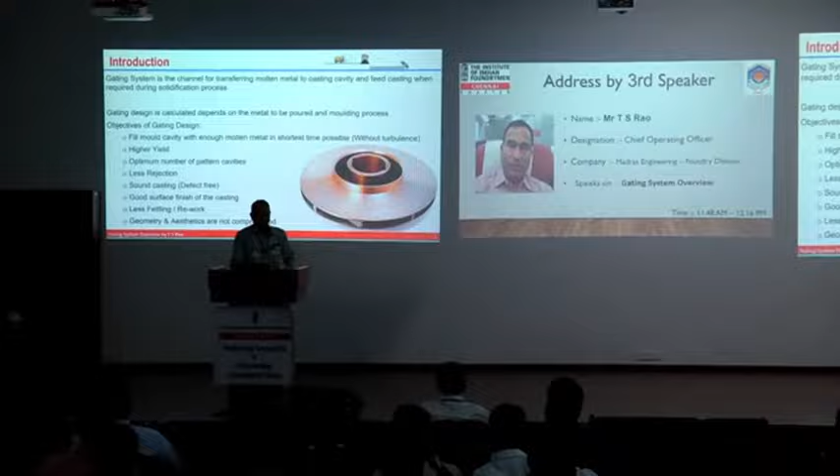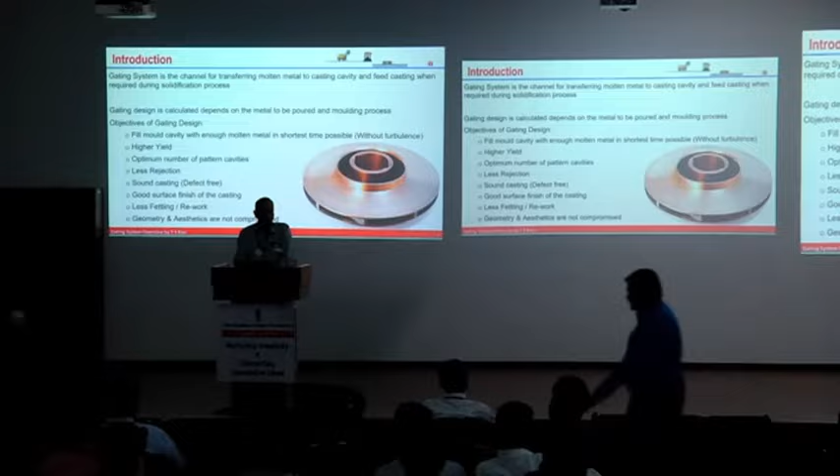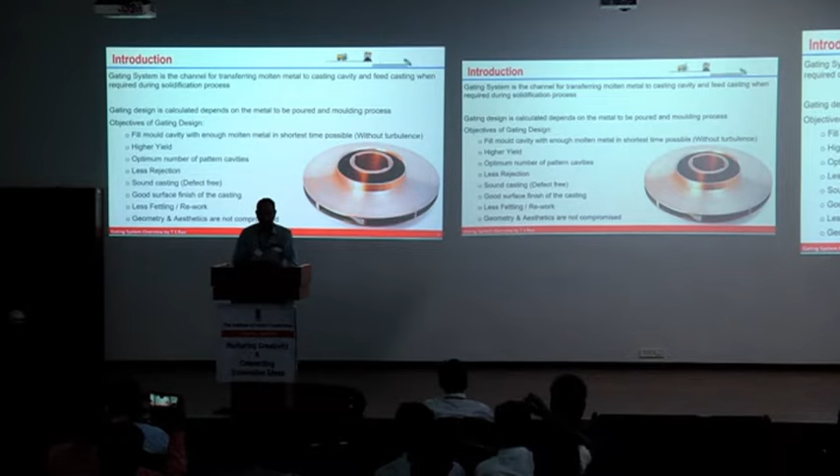Introduction. The gating system is a channel which is created to pass the molten metal into the casting cavity. The gating system depends on the material, the boundary conditions, and the processes we choose. The objectives remain constant irrespective of the material and the molding practice. We have to fill the mold cavity within the shortest possible lead time. Then you need a higher yield, like an optimum number of pattern cavities on the given pattern plate. And less rejections, sound casting, good surface roughness, less fettling or rework, and geometry and aesthetics are not compromised because of the gating.

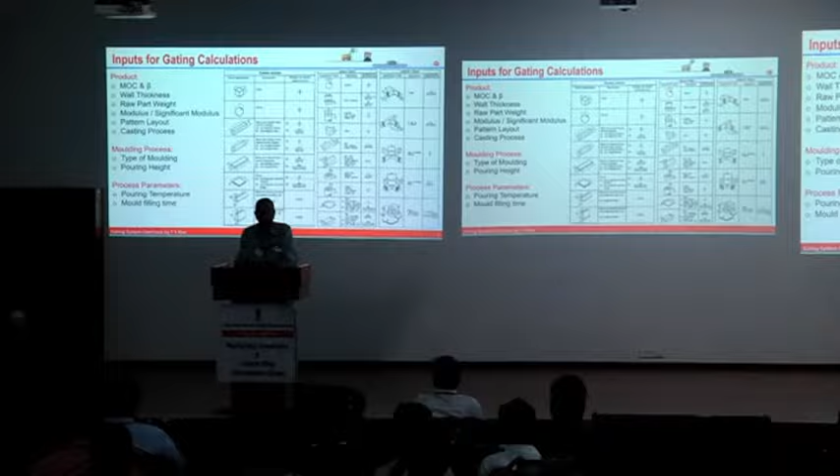These are the basic inputs for calculating the gating design: the material of construction and the beta. The beta is material specific. In gray iron, the beta is not significant. In ductile iron, beta is significant. In steel grades, the beta is more significant. The wall thickness of the casting you are going to develop, the raw part weight, the modulus, and the significant modulus. The modulus is the volume by the surface area. The hot zone with the last freezing area is called the significant modulus zone.

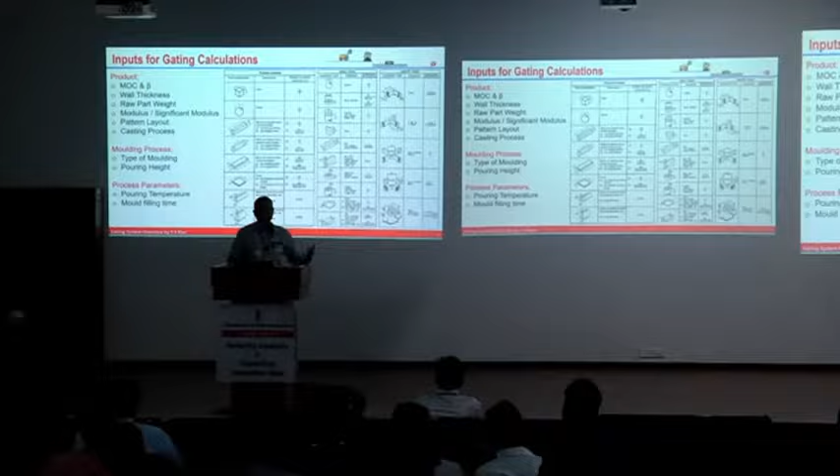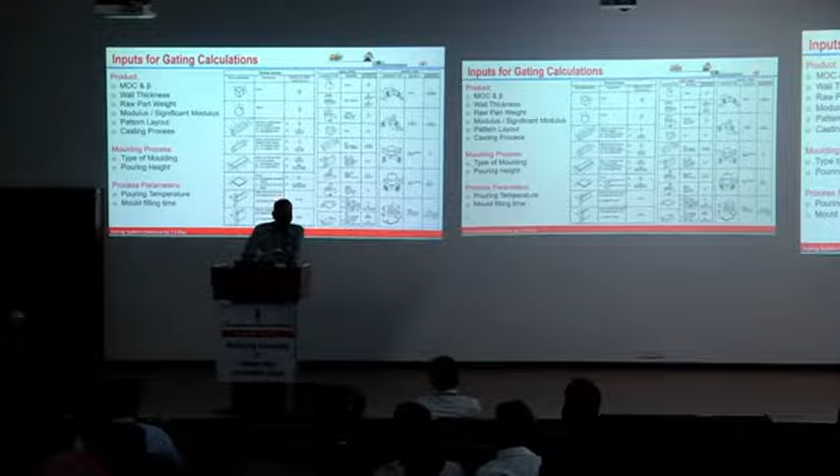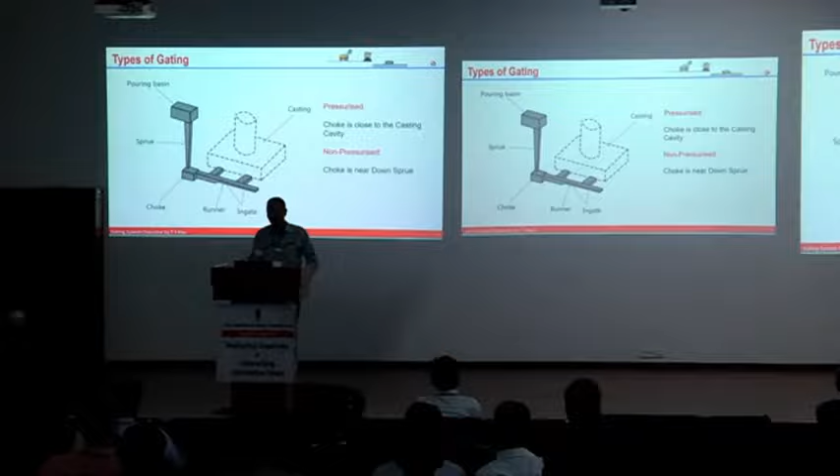On the next slide, the type of gating, there are two significant gating types. One is pressurized, another is non-pressurized. The difference between pressurized and non-pressurized is the choke. Where do you keep the choke? If the choke is near the casting, it is called a pressurized gating system. If the choke is near the downsprue, the gating system is called non-pressurized gating. Again, it depends on the wall thickness and the molding practices.

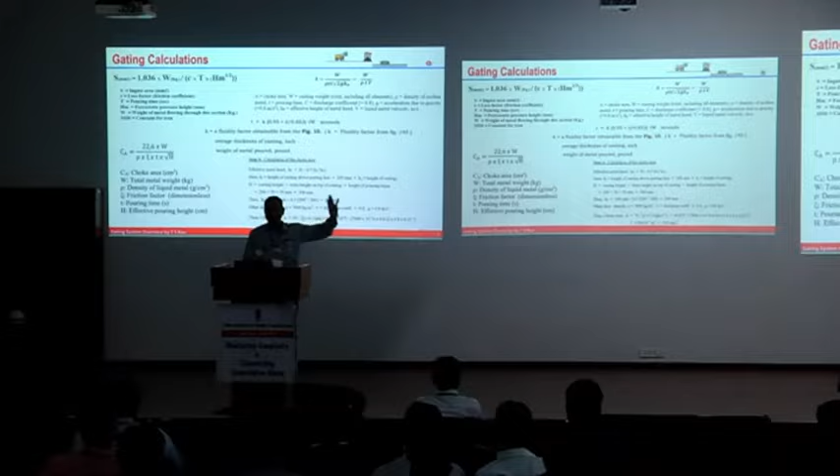We need to select what type of gating system we need to incorporate. Moving on, the gating calculation. There are numerous tables available, numerous calculations available for calculating the gating. But we need to customize, we need to select what is suitable to our requirement, and we need to try out whatever is the best and follow it.

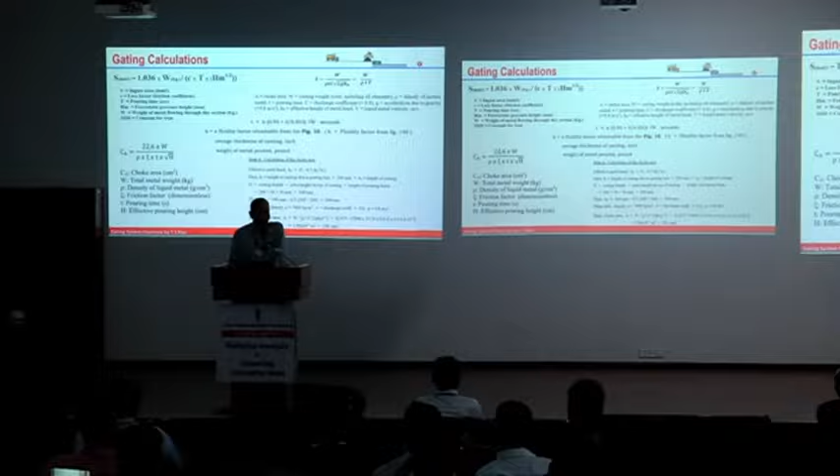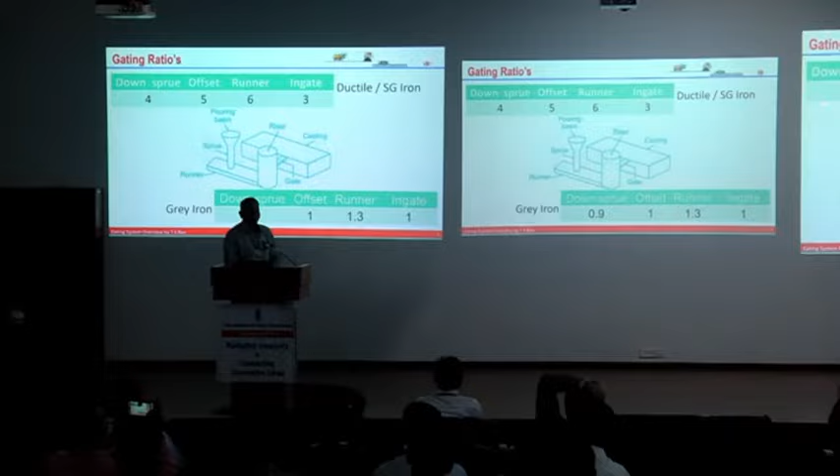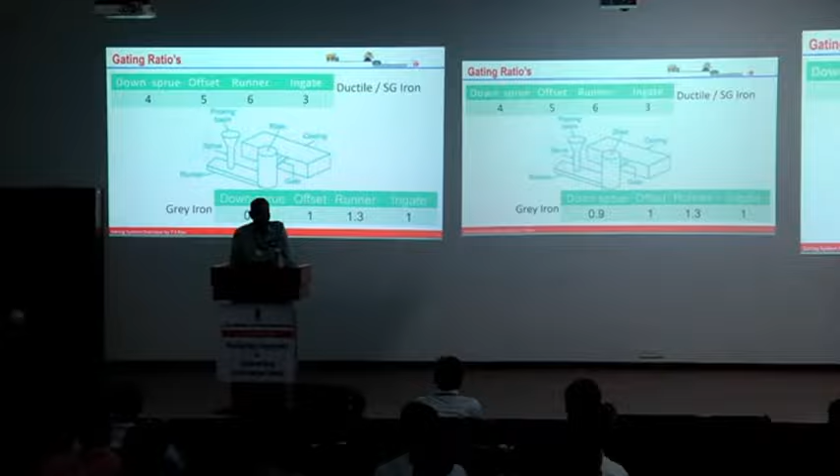These are the parts design. These are very important. The first one is the down sprue. This is the typical shape of the down sprue for withdrawal of the mold. And the bottom is called the sprue cup or sprue well. Next one is the runner bar. The dimensions of the runner bar are 1:2, where 1 is the width and 2 is the height, and some foundries make it tapered to have higher yield. Some foundries will have a slag trap at the end of the runner for collecting the slag.

The next one is the riser and the riser neck. For the riser, the dimensions are 1:1.5. When the diameter is 1, the height can be 1.5 or maximum 2. It cannot go beyond 2. And the bottom is the riser base. Then is the in-gate. The in-gate is 1:4. The length is 4 and the height is 1. And this is the neck which is connected to the casting. The chamfer is given so that the gating will not break inside the casting.

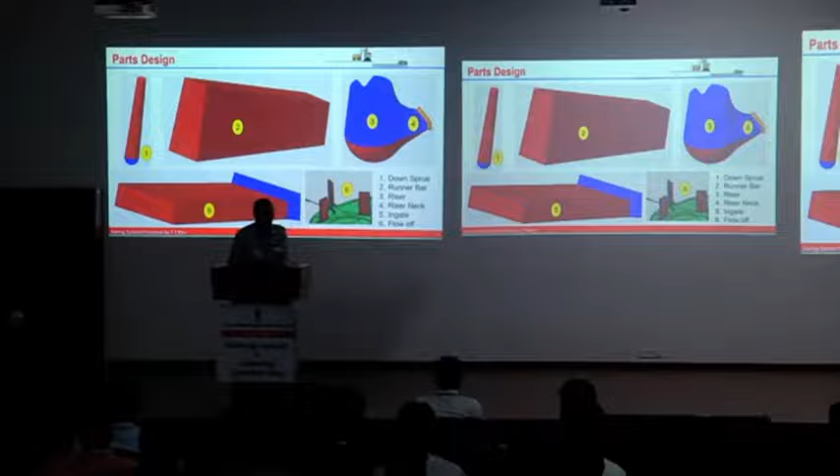These are the flow-offs. There are different shapes of flow-offs you can have. It can be round, square, or rectangle, and it has to be tapered down for the mold release. These are the feeders. The feeders are important for feeding the significant modulus in ductile iron or stainless steel.

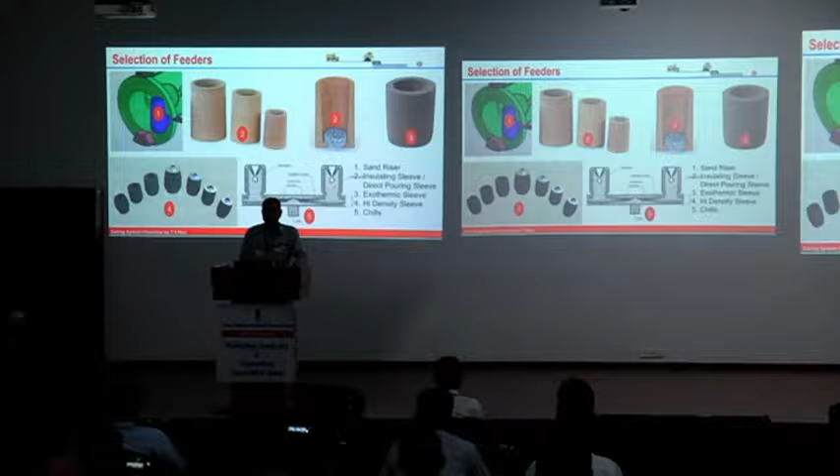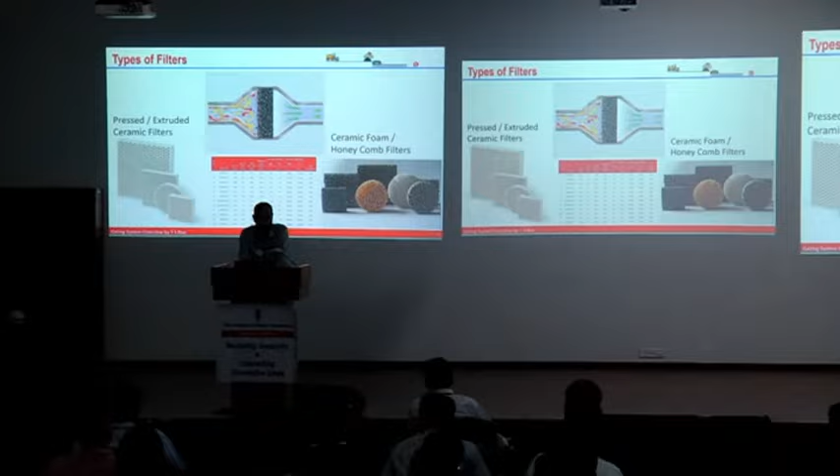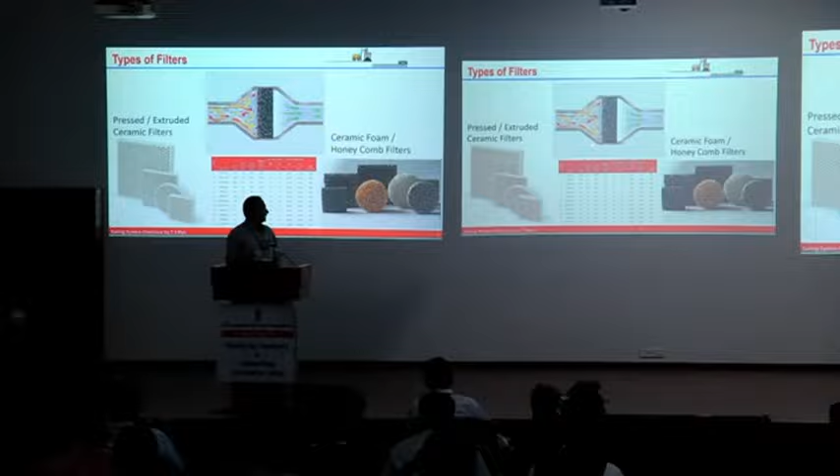These are the types of filter. There are two types of filters available in the market. One is the pressed or extruded ceramic filters, and it depends on the PPI, the pores per inch. Next is the ceramic foam filter or honeycomb filters. A lot of tables are available for selection of the filters. This is the purpose of the filter. It is like a tea filter. When the metal with contamination or foreign particles passes through the filter, only clean metal goes inside the casting cavity.

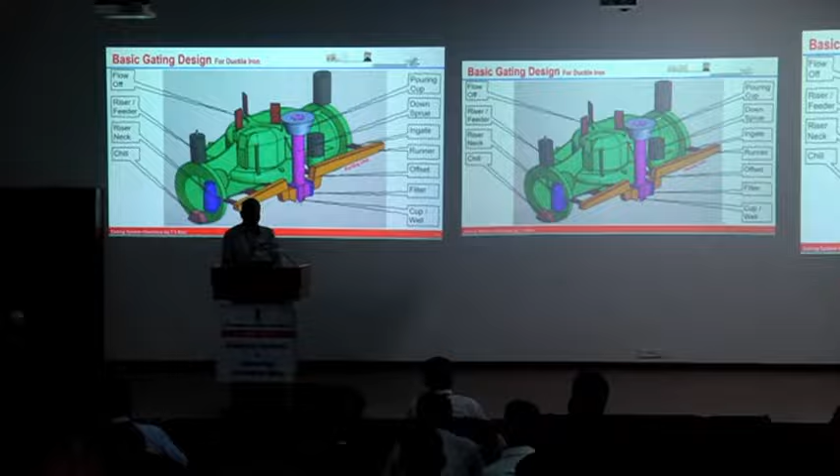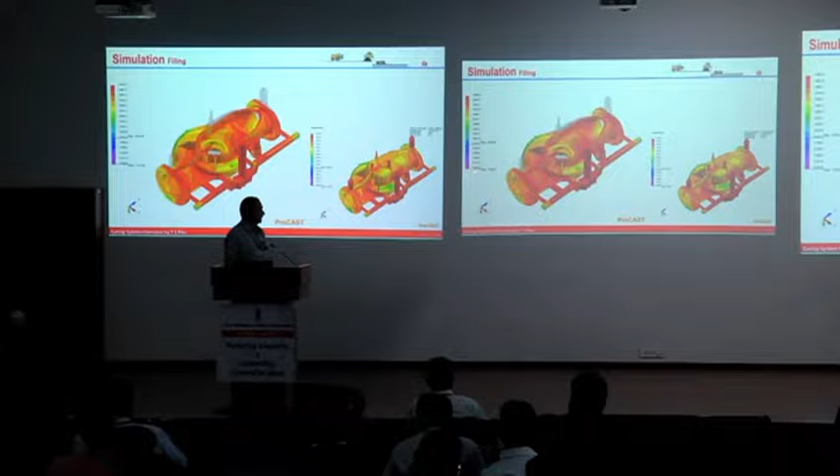So these are the simulations, thanks to the simulation software we have available now. The first one is the filling. You can see the temperature here, from 1123 to 1400. From the color code, you can make out what temperature it is. The hottest temperature is in the down sprue and in the risers, because these are exothermic; they retain the temperature for a long time.

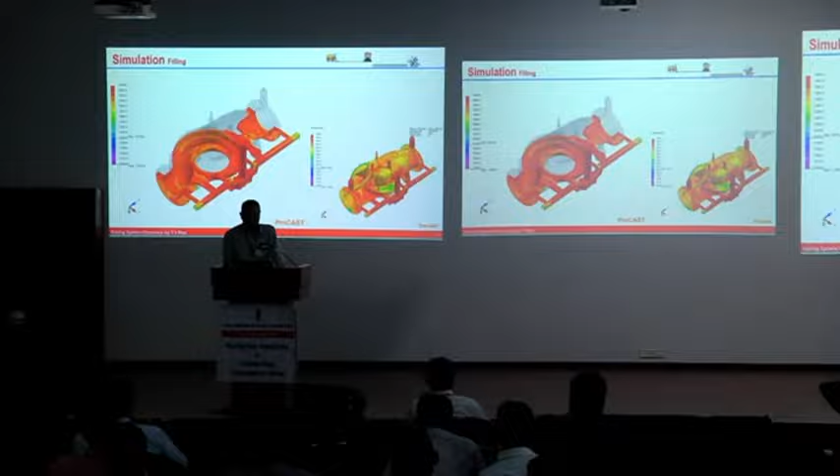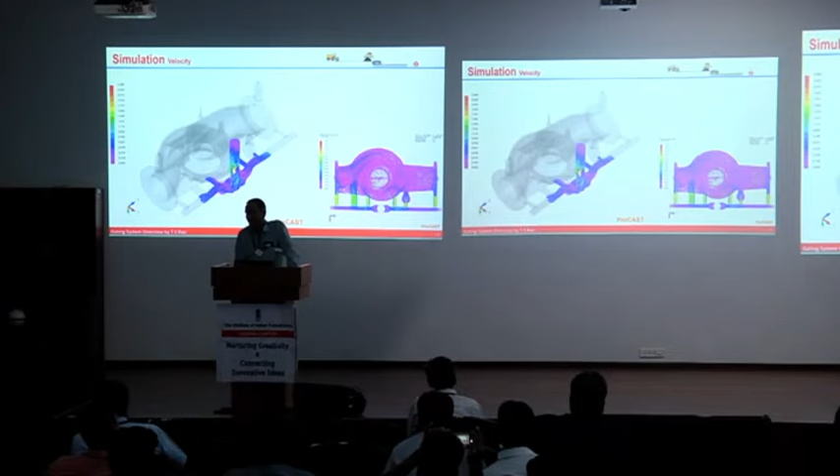The next one is on the velocity. Velocity is very important with respect to the casting quality. The higher the velocity, the higher the turbulence in the mold cavity, and the higher the inclusions in the casting cavity. Again, the velocity can be defined by the graphical form here, this color being 0 and this color being 2.

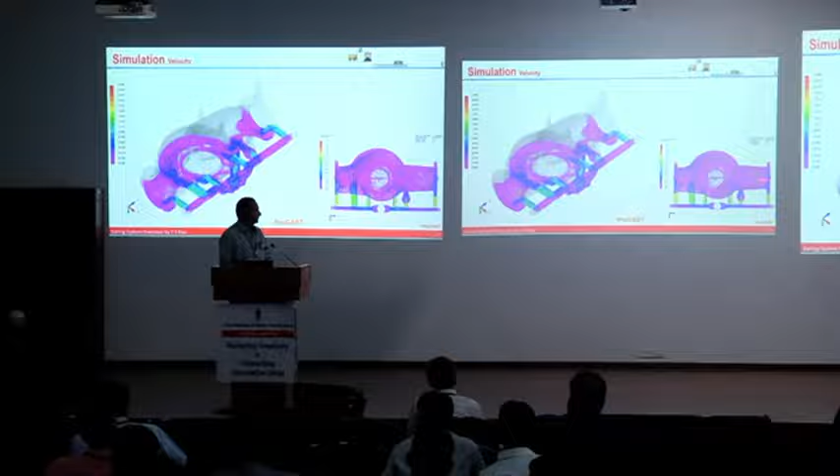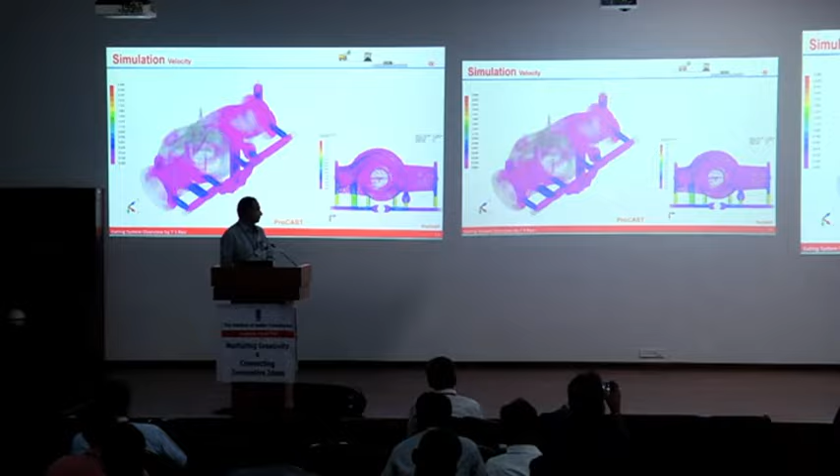Any velocity beyond 1.5 is dangerous. Normally you see the higher velocities in the ingates, because these are the chokes. We can also identify where the choke is in the whole gating system. The velocity is important with respect to having a sound casting and filling time.

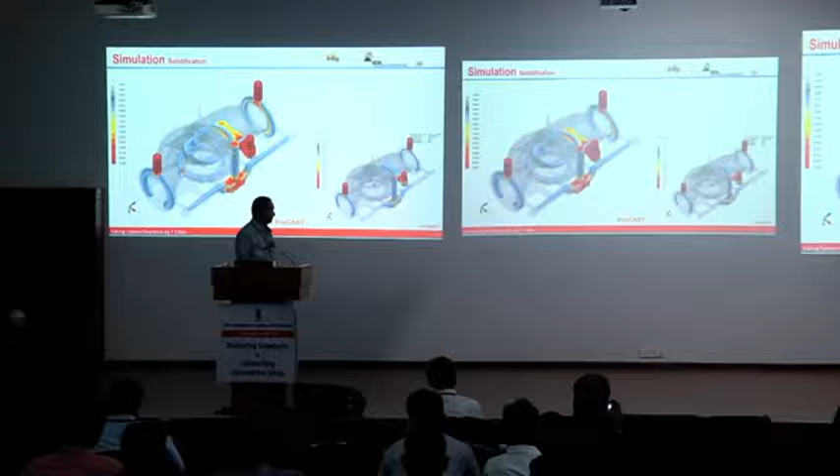Next one is the solidification, also called directional solidification. Here you can find out how the casting gets solidified. We know the thin wall starts solidifying first, and where the chill is connected, because chill is conductive, it solidifies first, then the directional solidification, and we can also see the isolated spots in the

casting cavity. Wherever it is solidifying last, if it is not connected to the feeder, you can see the zone. If it is not connected, we end up with a shrinkage here. Similarly here, if the isolated spots in the casting are not connected to the riser, we end up with a shrinkage.

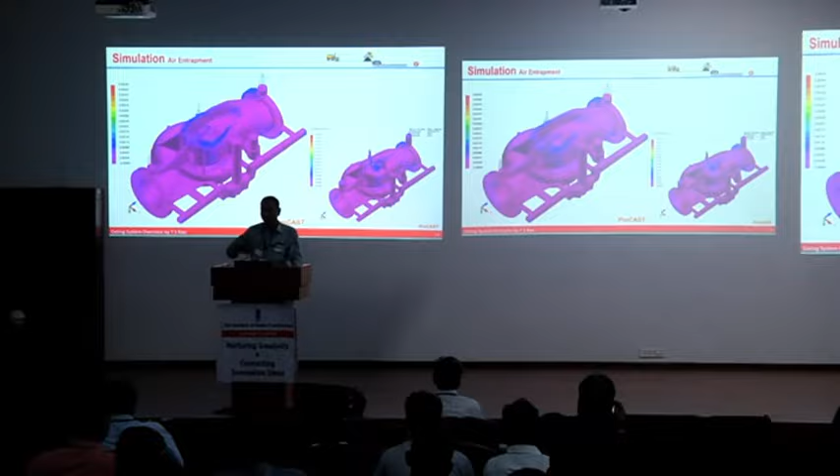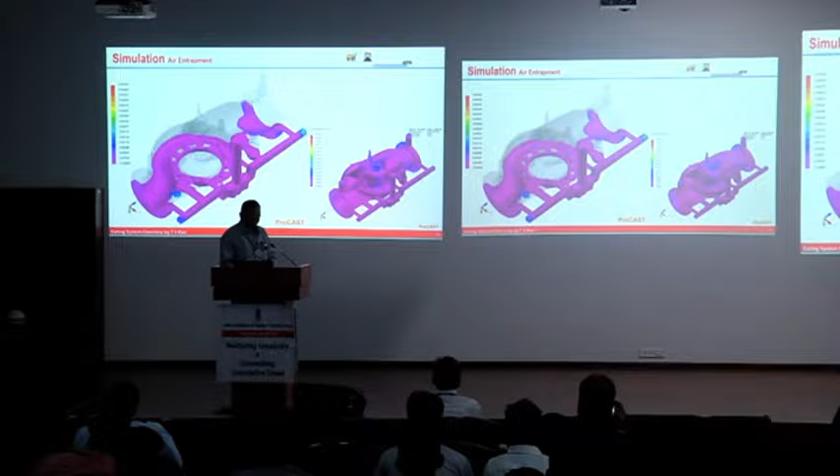Moving on to the air entrapment. Before pouring the metal, the casting cavity contains some amount of air and gases. When you pour liquid metal, we have to take care in the gating system: metal in, gases out. We can see how the air is getting pushed out through the topmost portion of the casting cavity, through the flow offs and through the risers. Again, we can see the air entrapment in graphical form.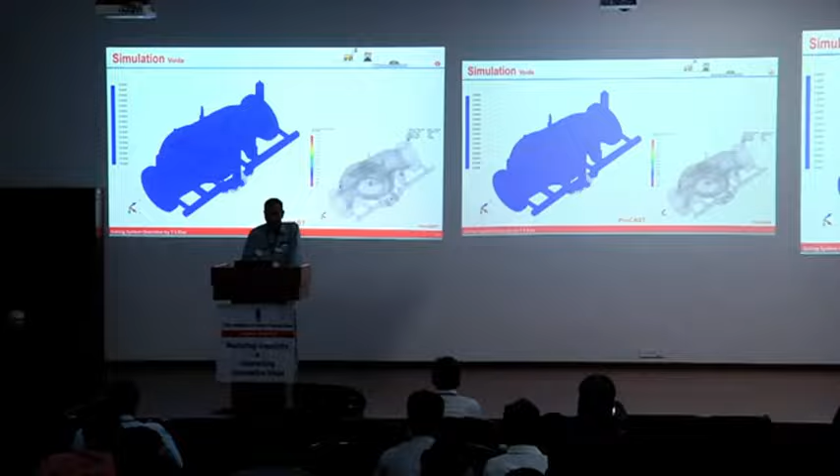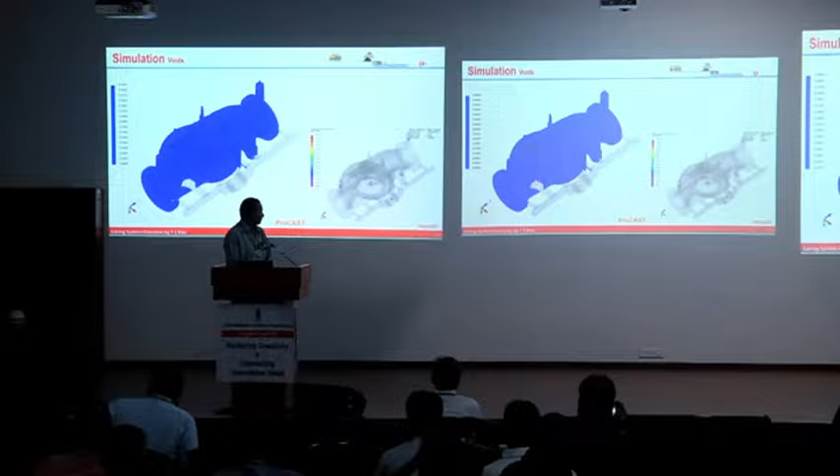Next slide is on the voids. Voids are like unfilled pockets. In some cases, if the gating is not properly connected, you can see some amount of void is created initially and then gets pushed out later. That also we can simulate, and then the gating can be corrected accordingly to ensure that there are no voids.

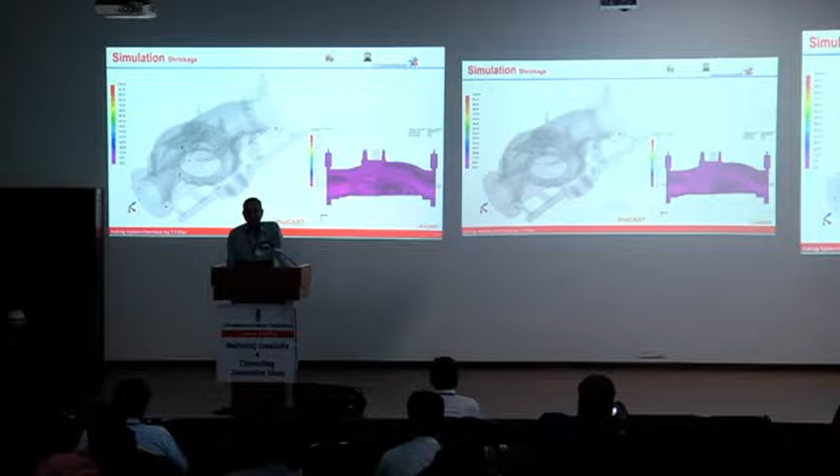The shrinkage: when the casting is getting solidified, we can see the hot spots in the casting. Again, the hot spots can be defined in graphical form like this, divided from 0 to 100, level 1 to level 5. The first 20 are considered level 1 radiography defect levels, up to 40 is level 2, up to 60 is level 3, up to 80 is level 4, and 100 is level 5.

If you see the casting cut section, we can make out from the cut section color that the whole casting is well within level 1 or level 2. So this is the indication that we can find out.

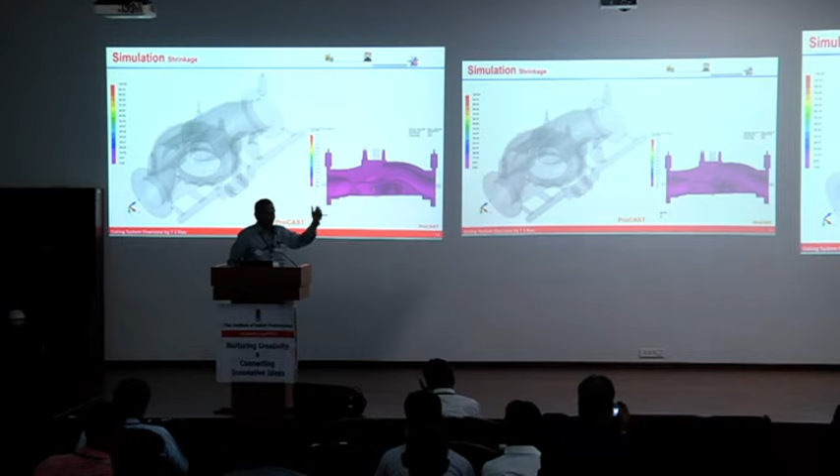Now the casting simulation software is more advanced. We can even check the hardness at a given point of time, the microstructure, and a lot of other parameters. This is a virtual foundry. The simulation software is a virtual foundry that saves the number of iterations on the shop floor.

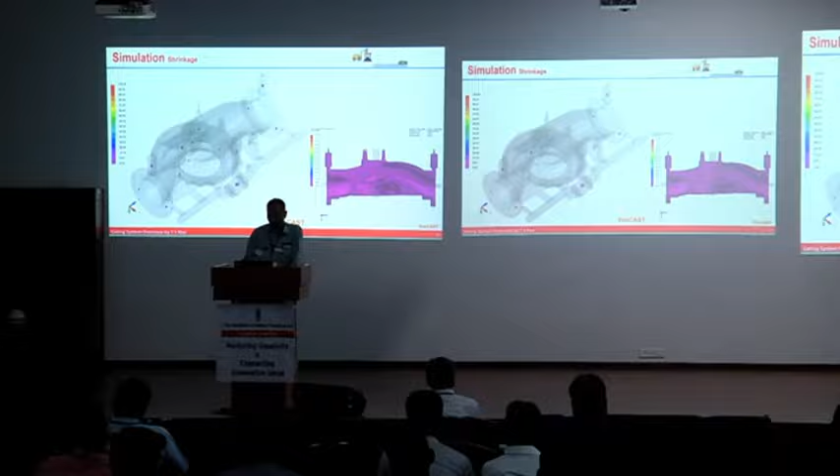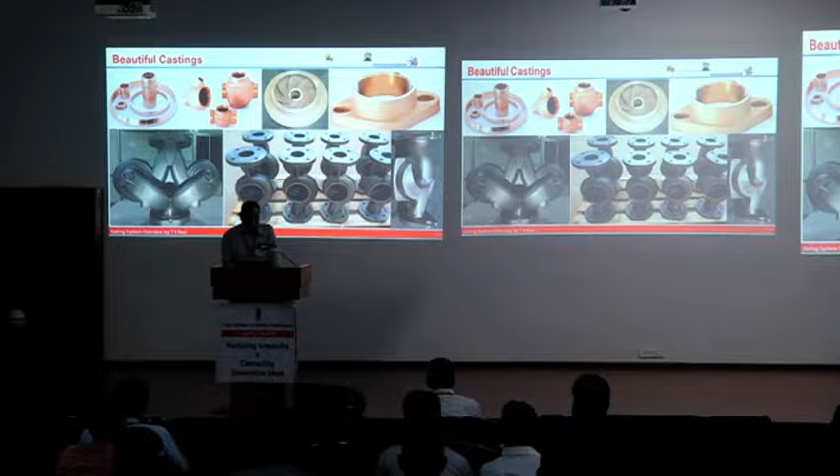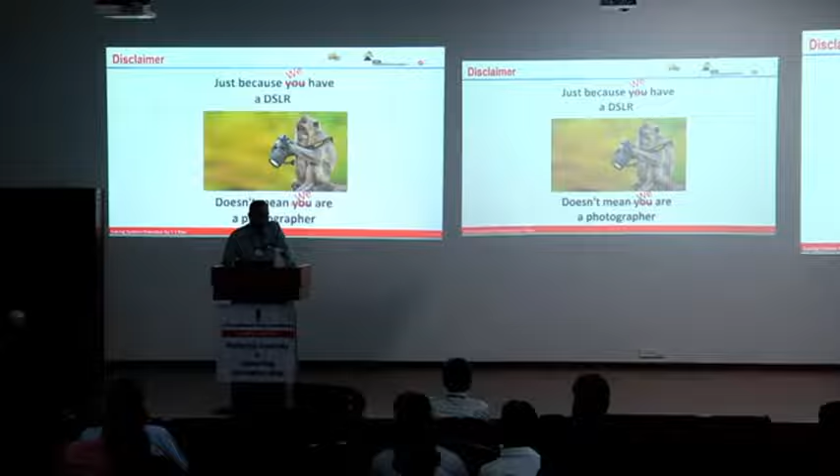So it is up to us. How do you fix it? By taking the parameters from the laboratory, we need to fix it. The advantage is, instead of fixing it on the shop floor as in the earlier days, we have an opportunity to fix it in the software. We can reduce the number of iterations by using the simulation software. So we can do any number of iterations in the software until we are fully confident that we are going to do it right first time.

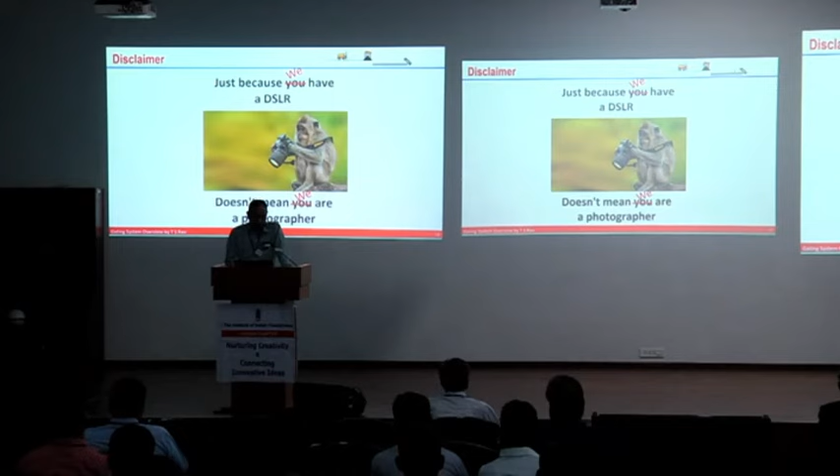See, pressurized, as I said, is where the choke is connected to the casting cavity. Okay, I'll tell you. Pressurized is required for low wall thickness castings, and it is not suitable for green sand because the green sand mold is very soft. So, in the pressurized gating system, the green sand mold is likely to wash away because of the velocity of the metal, and then the sand particles will get stuck in the casting.

So it depends on the wall thickness and on the molding practice. We need to select either pressurized or non-pressurized. Normally, for cylinder blocks, pressurized gating is used. For other castings, non-pressurized. For green sand, non-pressurized. PPI depends, 10 PPI or 20 PPI. Normally for gray iron, you can go for honeycomb filters, which are cheaper. Normally for ductile iron, you can go with ceramic foam filters. These are a little expensive, but they are more effective.

Now people are focusing on more yield. So there is a discussion about riserless casting. We have a lot of feeders. Riserless casting is called feed pour or direct pour. We can directly pour on the casting. The highest yield I achieved is 98.2%. Even today, that is a record in India.